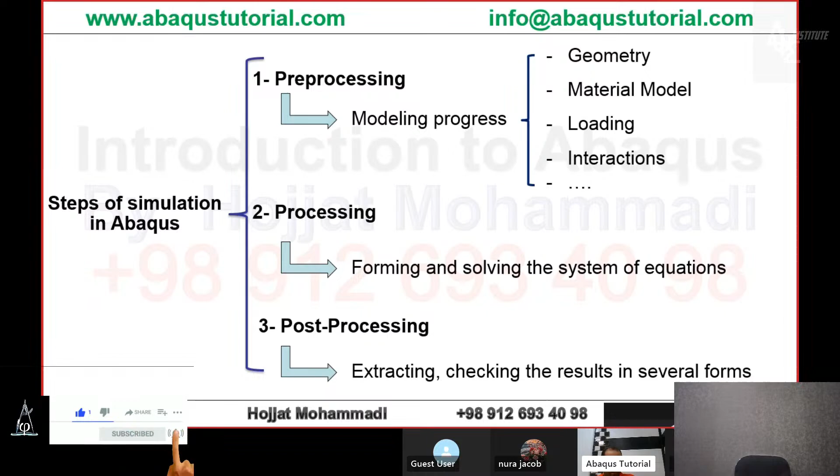Now, I have to say some tips about the modeling procedure.

First, we have to define a discretized geometry in our model. We draw or import a new geometry into the program, then discretize it and divide it into parts which we name elements, nodes, integration points, and section points. As you can see in the figure, this portion of the plate is a continuum definition, meaning all masses and volumes are mixed together, but during discretization we separate masses and name them nodes, and volumes and name them elements.

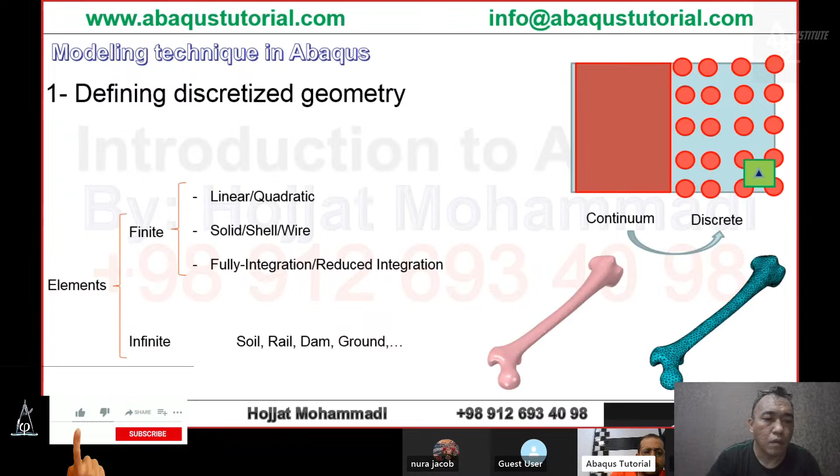Next, we have to define the material model. I have to say something about material and material models. As you know, there are many materials all around the world, and most people are familiar with them. For example, steel, wood, concrete, glass, cast iron, plastic, polymer, composite, bone, and ceramic are types of materials which are very famous all around the world.

And most people, whether they have academic literacy or not, know them.

But in FE commercial packages, we have to work with material models, not materials. I mean, we have to define mechanical models of material. For example, if we want to model a steel beam, we have to decide if its elasticity behavior is linear or not, or what kind of plasticity the beam will have, or something like that.

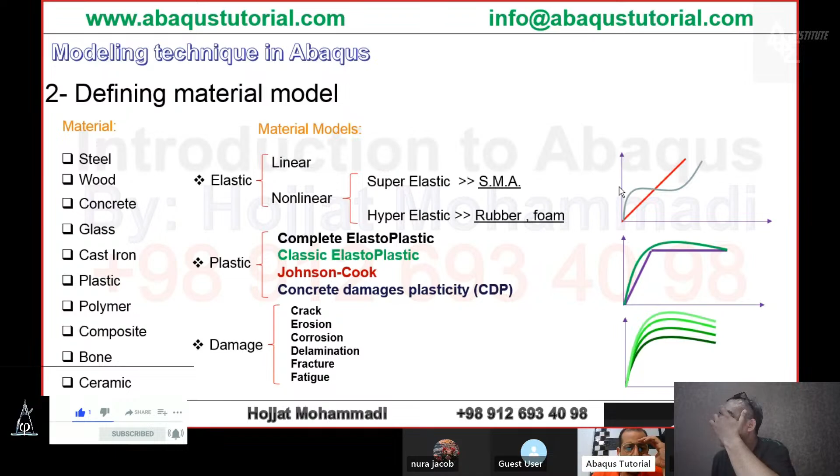But when we mention linear elasticity, we mean that the stress and strain components will change at a fixed rate. As you can see, the red line in the stress-strain diagram shows a linear change between stress and strain. It's very famous and a well-known behavior for a wide range of material models.

But the other type of elasticity is nonlinear, which means that the stress and strain variables will change at different rates, as you can see in the gray diagram. There are two types of nonlinear elasticity which I mention in this slide: the superelastics and hyperelastics.

The superelastic, for example SMA or shape memory alloy, will never experience plasticity. The hyperelastic or hyperelasticity materials such as rubber, foams, muscles, fats, and something like that will be used to model damping procedures, damping simulations, and used in some industrial designs.

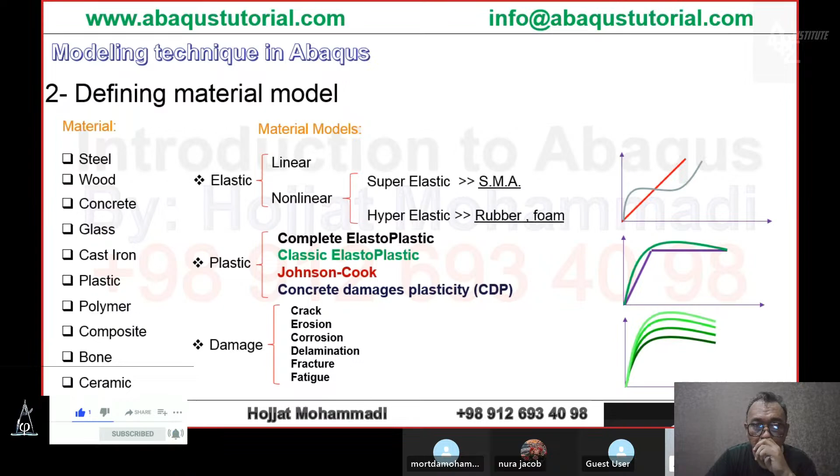Delamination and debonding is a kind of damage which takes place when we bend a plate, a delaminated composite plate, and some plies are damaged due to the passing of ultimate stress. Fracture and fatigue are other kinds of damage for which we have to define the corresponding data.

After that, in the third step, we have to define the analysis step. There are many classifications of steps, and I will say something about the main two classifications in this slide. The main classification is time dependency. It means that analysis steps are divided into two types based on their time dependency.

The time-independent problems are the problems in which we can ignore the impacts of accelerations in our model. It means that in those problems the structures will not experience changes during the simulation. For example, structures under their own weight can be analyzed in a time-independent protocol, and time-dependent problems are divided into two main groups.

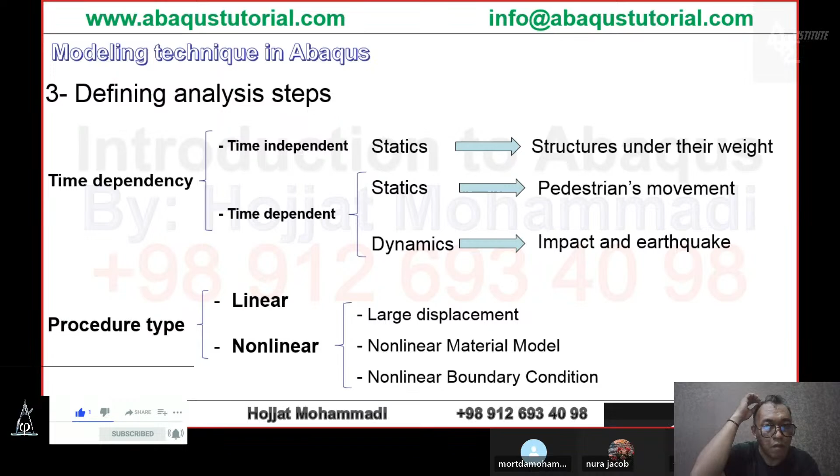After that, we have to decide about defining circumferential conditions. I mean that we have to define our part's behavior with the other parts. There are 5 items which should be considered when we want to define circumferential conditions. First of all, we have to take care about the loading protocol. I mean, we have to define the loading protocol as well as possible.

Loading means anything which excites our structure. Loading can be force or heat flux or acoustic impedance or something like that. In structural problems, we face many forms of force as the loading. For example, point force or concentrated force, edge force, distributed force or pressure, body force, and something like that.

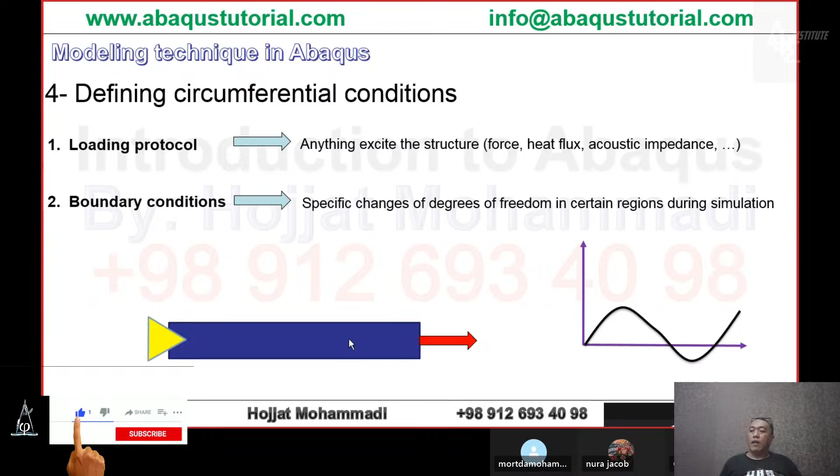For example, if we want to simulate a human body, it's not very easy to define boundary conditions. But, for example, in a cantilevered beam, in this beam, it's very easy to realize the boundary condition. Okay. Then we have to define interactions. Interaction means defining the method of interactions between parts based on the simulation process.

As you can see at the bottom of the slide, there are 2 beams which are placed with a clearance. In fact, the clearance can disappear if the upper beam experiences a large amount of load. Otherwise, the upper beam cannot fill the gap, and the upper beam will not reach the lower beam.

Okay, so interactions depend on the problem situation, and it's not very easy for users to predict what will occur when some parts interact with each other. Friction is the general and the most famous definition of interaction in structural problems.

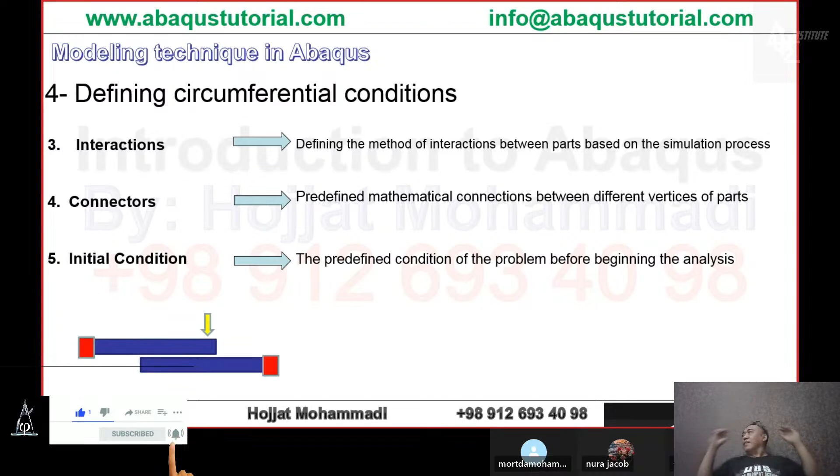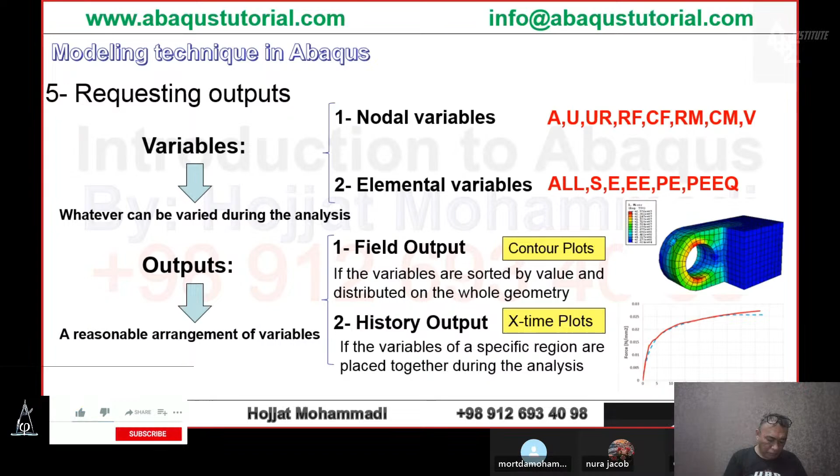Okay, and finally we have to define a job. A job definition includes the subroutine files directory when available. Decide about restart or full analysis of the model. In addition, we can decide about the allowable physical memory for our analysis, I mean the accessible RAM, and we can determine the precision level for the ABAQUS explicit solver, which I explain later, and something like that. It's the final step of the modeling process in ABAQUS.

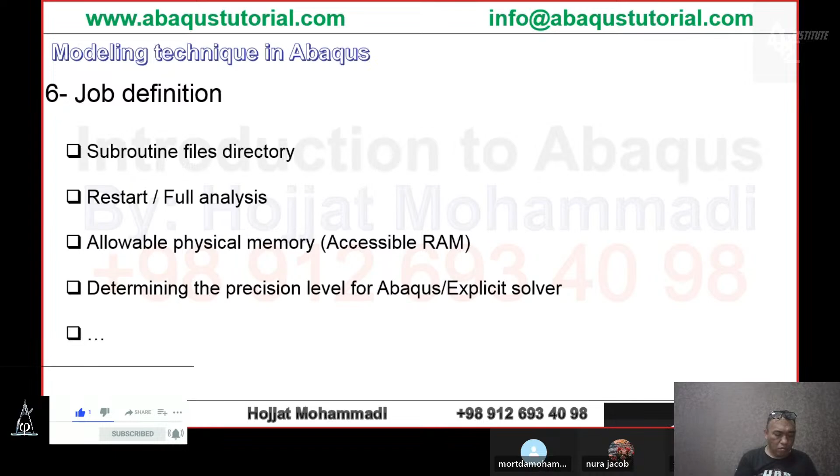And after that, we have to submit our model to be solved by the program. Please note that all the process can be carried out in ABAQUS CAE as the main GUI program available in the ABAQUS package. The program is very user-friendly and has a powerful GUI which helps users conduct their problems step by step, and they can review their model easily.

Okay, if you have any question, please let me know. Vortex, do you mean fluid flow simulations? Vortex or vertex? If you mean a turbulence simulation, please note that the course is a basic one. I'm not an expert in CFD analysis; I'm a super advanced user just in structural problems, not CFD models. These types of problems are very complex for me. I did a vortex and turbulence fluid flow before, but I think it's very hard and these problems are very complex, to be honest.

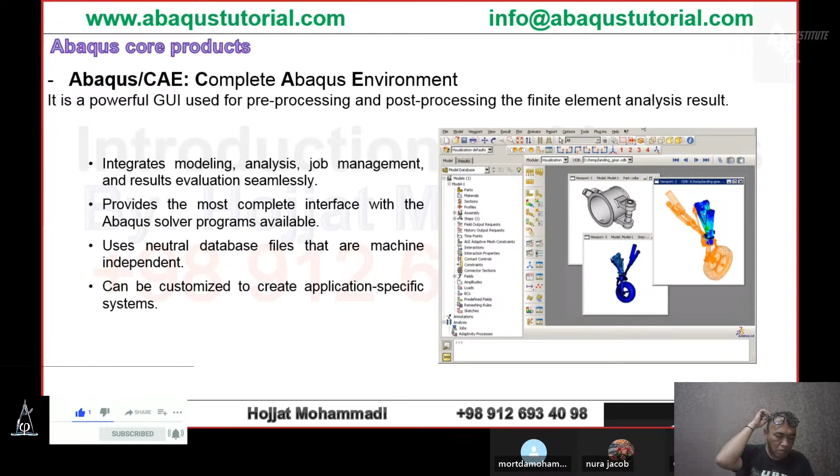So I have to say something about the products available in the ABAQUS package. The main product is ABAQUS CAE, the complete ABAQUS environment, in which users can model their problems easily. After that, we have some solvers. The main and general solver of the ABAQUS package is ABAQUS Standard, a general purpose finite element solver that employs an implicit integration scheme, the traditional process, based on an unconditionally stable method.

I mean that in this procedure, the program tries to find a solution to the nonlinear system of equations iteratively by considering the current state of the system as well as its subsequent time state. The solver is very famous all around the world, and many problems can be analyzed with it. For example, frequency extraction, buckling, nonlinear static problems, heat transfer, coupled temperature-displacement problems, acoustic problems, soil consolidation, and other problems can be simulated with the solver easily.

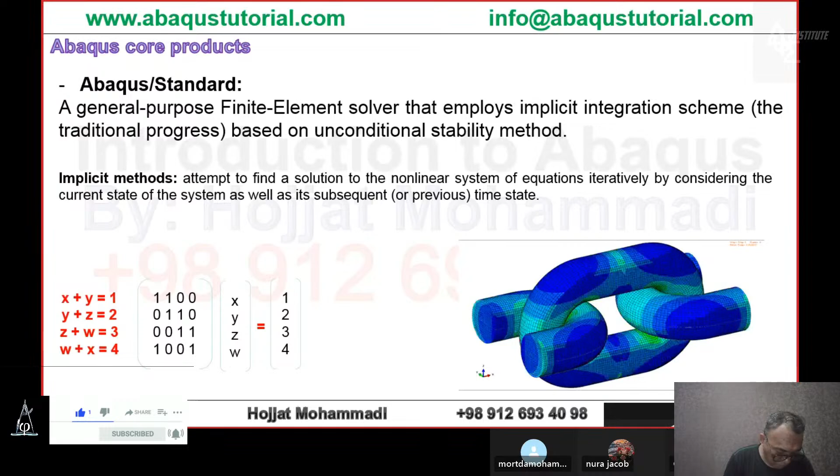The matrices are coupled, and the coupling of the equations prevents the program from having an efficient calculation. This is why the ABAQUS package has another solver.

As you can see, ABAQUS Explicit is a special purpose finite element solver, not a general purpose one. It is a special purpose finite element solver that employs an explicit integration scheme to solve specific problems, based on a conditional stability method, not an unconditional stability method.

Explicit dynamics is a time integration method used to perform dynamic simulations when speed is important. So explicit is for dynamic problems in which the acceleration is very important. Explicit dynamics accounts for quickly changing conditions or discontinuous events, such as free falls, high-speed impacts, and applied impact loads, as you can see in the GIF at the bottom of the slide.

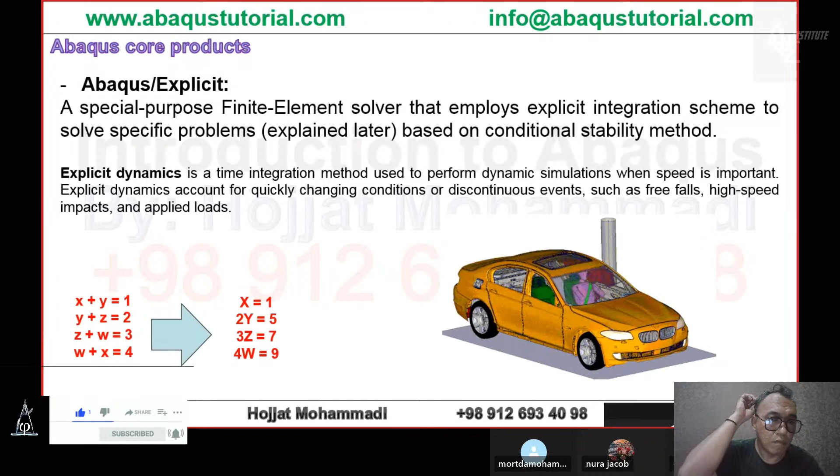As you can see, the four equations were converted to four new ones in which each equation can be solved independently and doesn't need the other variables. So the solver is very efficient and very useful for problems in which complex nonlinearities and high-speed events are present.

The next solver presented in the ABAQUS package is ABAQUS CFD, a computational fluid dynamics solver which provides advanced capabilities with extensive support for pre-processing and post-processing. Computational fluid dynamics is the analysis of fluid flows using numerical solution methods. Using CFD, you are able to analyze complex problems involving fluid-solid and fluid-gas interaction.

Please note, I'm familiar with the solver, but I have less experience with it than the two former ones. As you can see, in this solver we are able to model fluids and their effects on other parts, for example, solid or fluid parts.